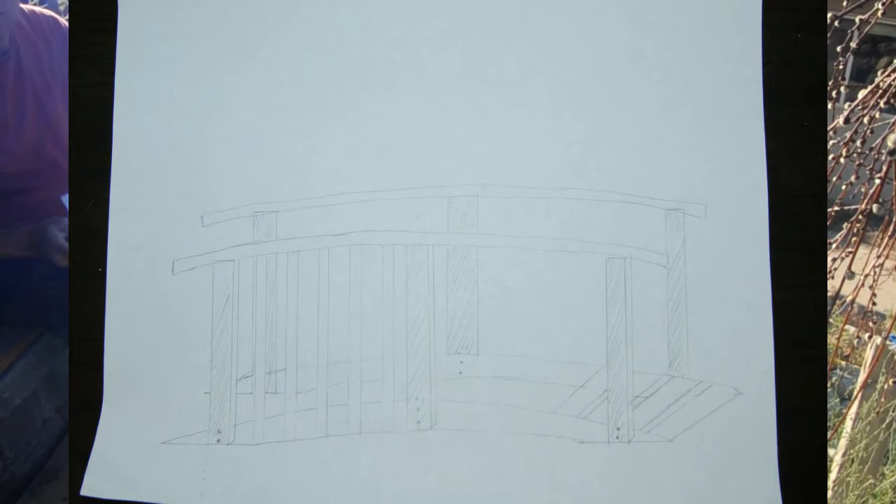Hi, the project for this week is to build a bridge across this stream here. When working with this project, I thought it's best to do some type of design. So I have a design here. This is my design of the bridge.

I'm going to start with the posts, the 4 posts, which I have here. This is redwood or common wood. I want to measure it up, so I estimated about 110 centimeters high. That's how high I want these posts and the railing. I also want to make sure it's wide enough so I can get a wheelbarrow through here. That was my goal, so if I need to carry stuff around the back, I can do that.

Just use a spade to dig a hole here. So I've dug my hole approximately the height I want. We'll just put it in and measure it. It's about 110 centimeters, about the height I want.

I'm going to leave that for now, not fill it in, and do the other 2 poles. Okay, so I've dug my 4 holes and put my posts in there. I haven't filled it in yet, so I just wanted to get a rough idea of where they should go.

This side here is going to be a little tricky for me because the path goes to the left rather than straight. But all I'll do is start with this one here. I'll get this one square and just right, then base this one from that one, and I'll probably start with that one, and this one here I'll just move it. So I'm going to fill this one in.

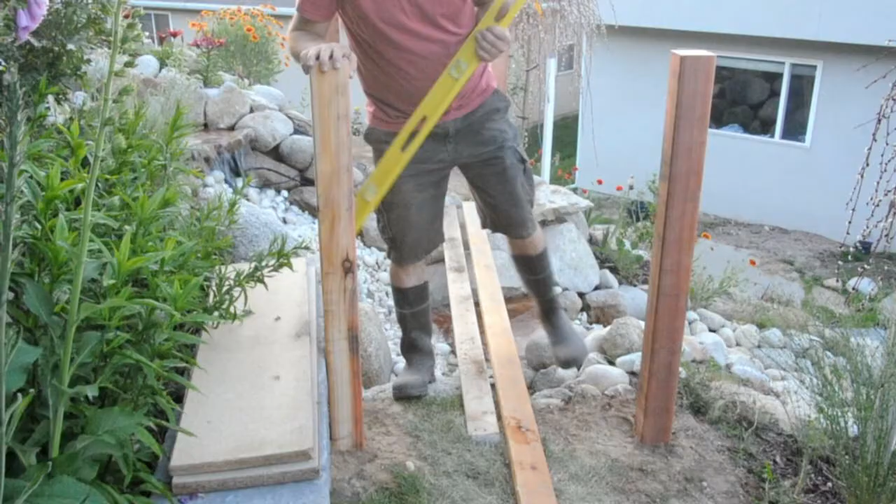The next part is to get this part level, hole here level. So, okay, here we have it, I've done all 4 poles now. Make sure that they're both level this way, and this way, on all 4 of them.

I also measured the distance between here and here to make sure they're right, and make sure they match both this side and that side, and this side and this side, so they all match exactly. That's what you want to do.

Make sure they're really nice and stable. If you can line them up this way so they both match. The board will go on this side and this side, so make sure they line up this way as well. Okay, that's the hardest part done, I think.

So now that I have these poles in, the next part is to get the baseboards in on either side here. And what I want to do is, because I'm going to put an arc in the bottom baseboard, we don't want it to end here. We want it to end a bit further off, probably about 1 foot off the post here, so we have enough area for the bolts to go into the wood here.

So I'm going to measure from this side to this side and add 1 foot on each side before I cut my wood.

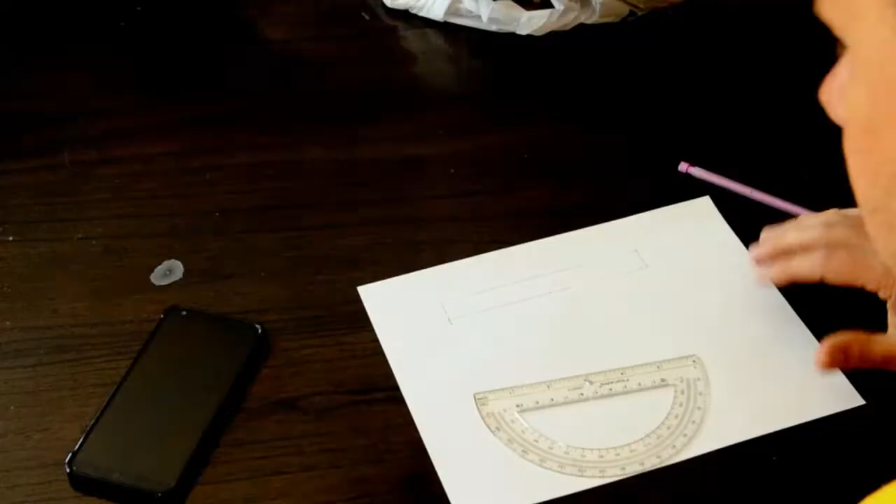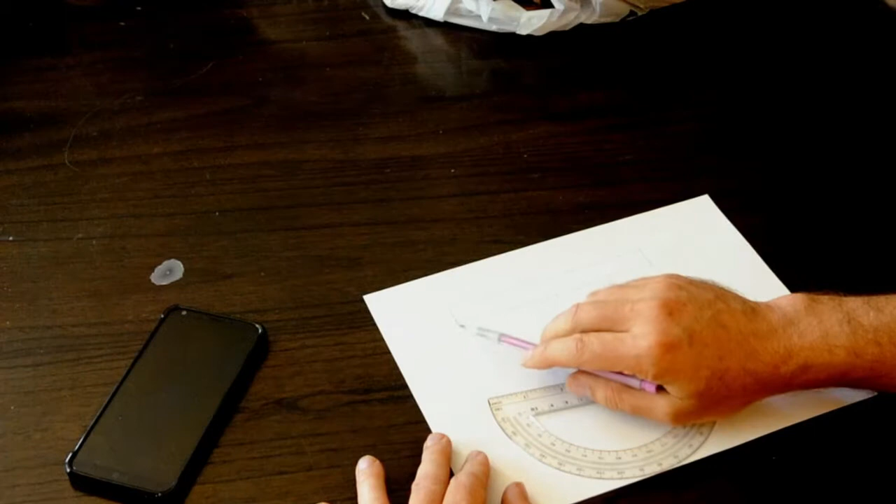Okay, now it's time to do some calculations. I've bought a 10 foot by 12 inch redwood board. That's what I'm going to use for my bottom baseboard with the arc. So the idea is I'll try to draw this as best as I can. It's the halfway point.

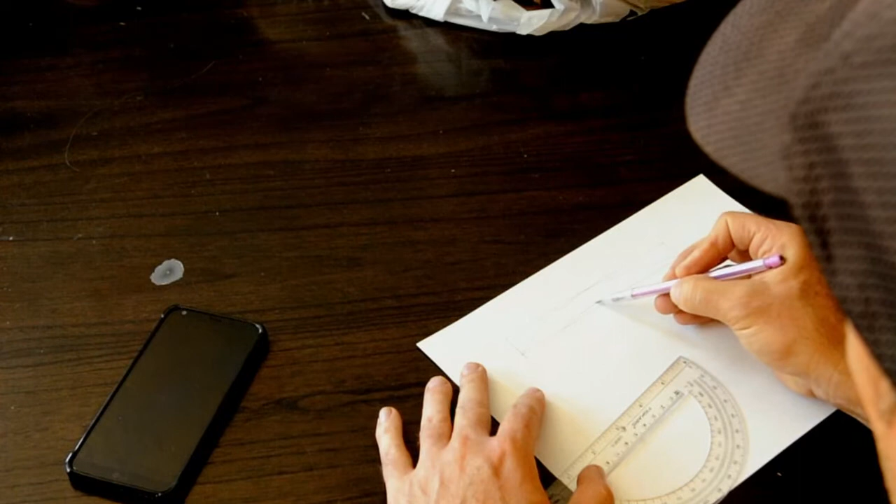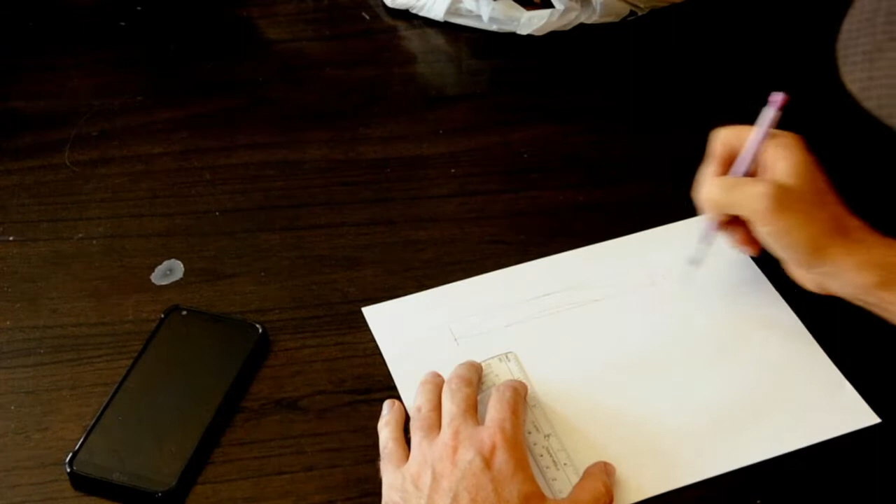An arc that goes like this. It's not such a good arc, but then the bottom part there as well. So the tricky part is to get this perfectly rounded, and to do that we're going to have to do some calculations to get the right arc. The idea I have here is I'm going to just draw a line down there.

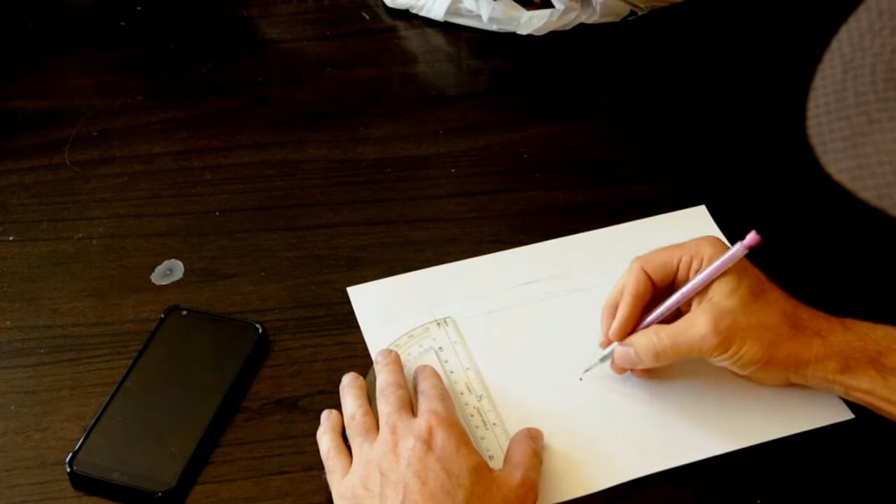This will be a circle, so from here to here there's a point there. I'm going to put a string, and at the end I'm going to have a pencil, and from that point I'm going to draw my line of the arc. We need to figure out what length from here to here I need to put my pin so I can do this arc. Now from that point to that point we know is R.

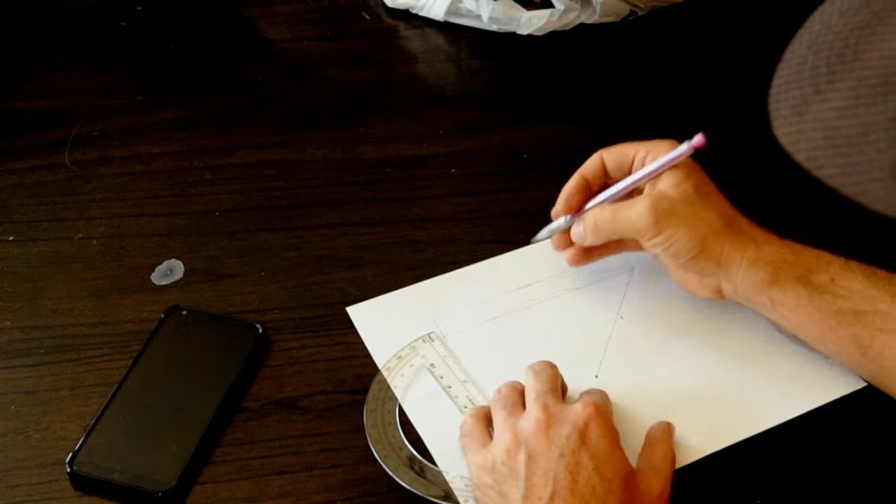That here to here is 12 inches. So we have a right angle here, and we know that this length here from here to here is R minus 12 inches, because that's 12 inches and that's the radius. So using Pythagoras' theorem...

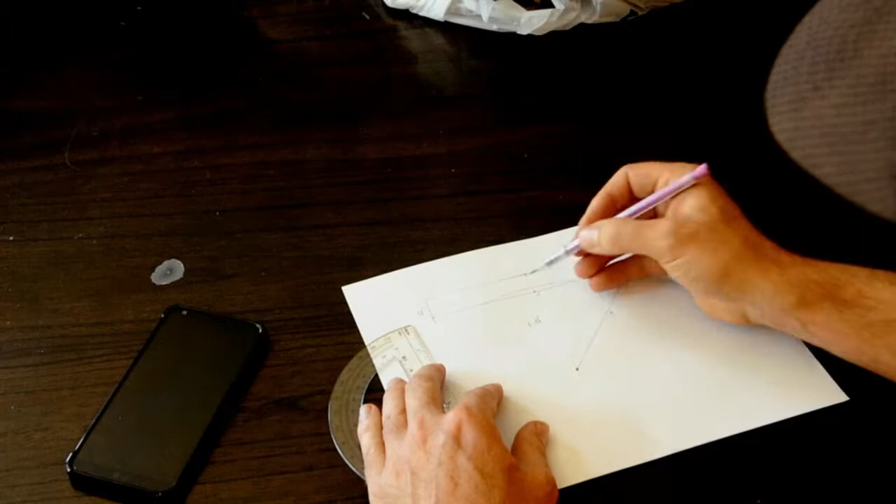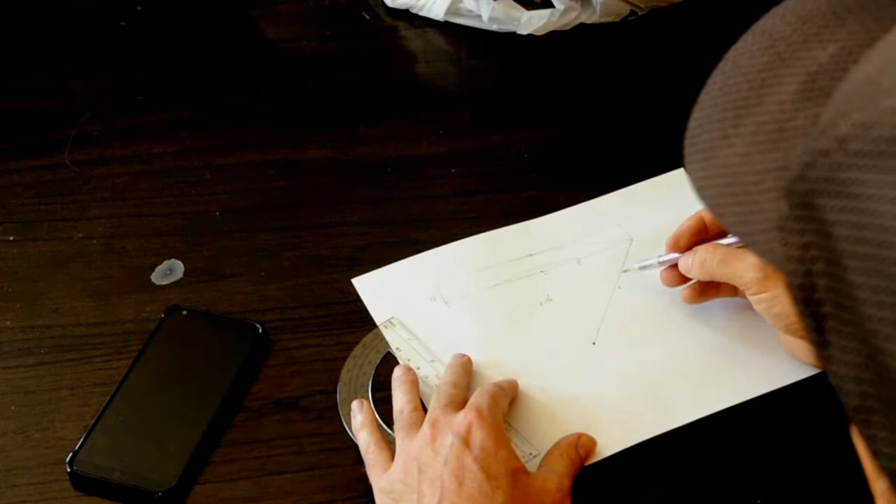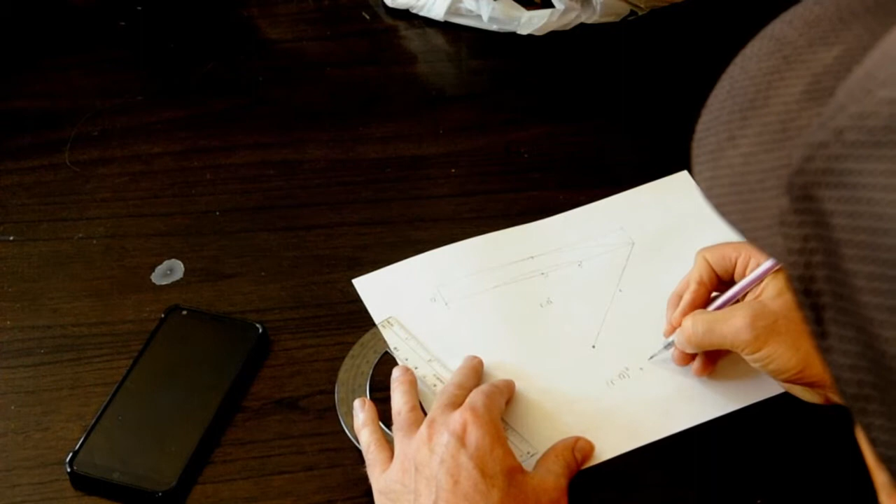So we know what this length is here, Because I said this is 10 foot, so that's 5 foot here, from there to there. So then we know that in Pythagoras, that squared plus that squared equals that squared. So R minus 12 squared plus 5 foot squared equals R squared. So you want to convert this to inches, so what's that, 60 inches.

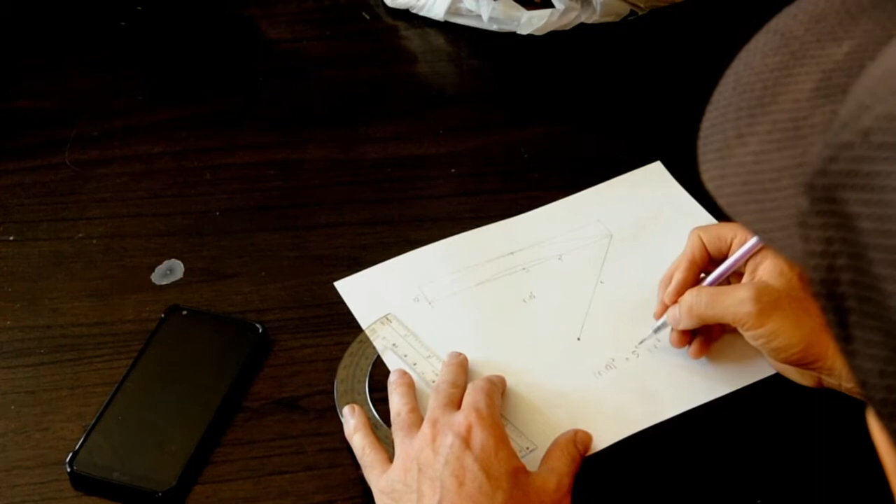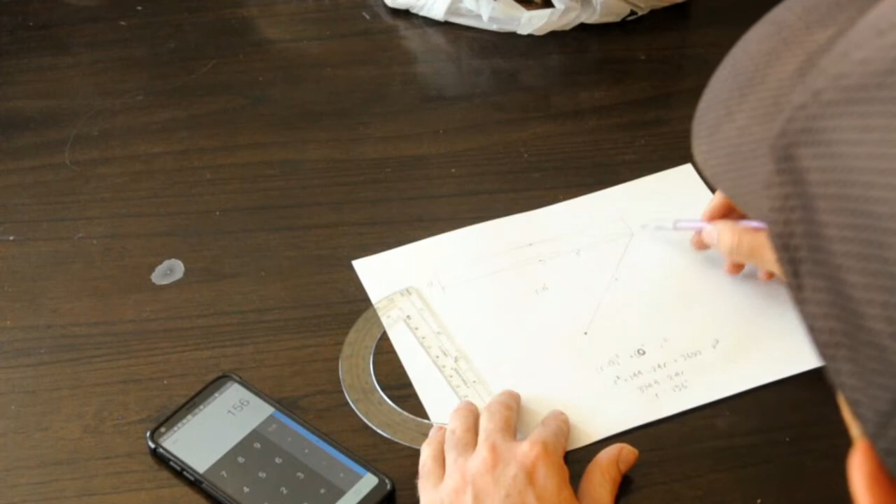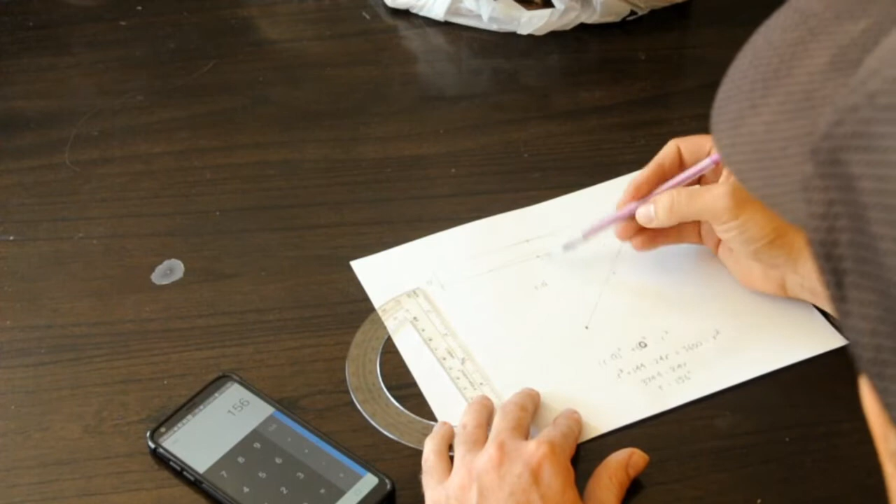So we know this here is 156 inches. So with that, now I can figure out where I need to put my pin so I can do my arc, which is this point here is 156 from the top here to here, 156 inches. I'll put a pin and draw my line.

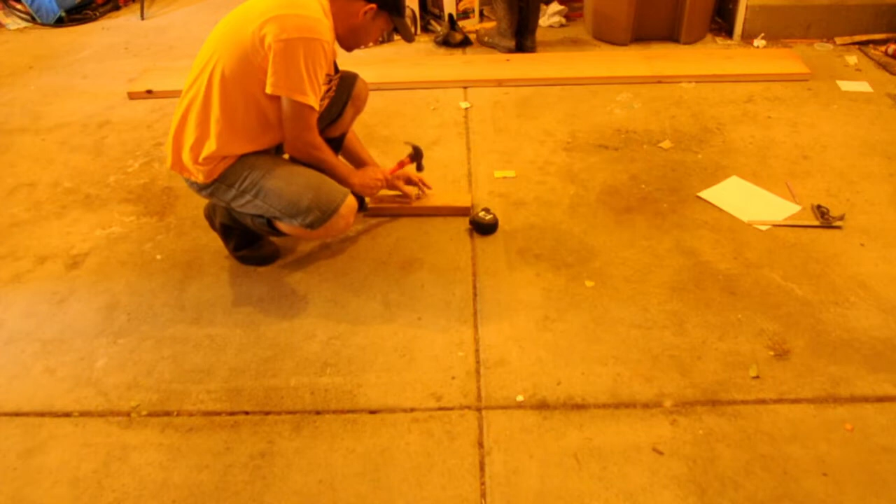First thing I'm going to do is just mark my halfway point. I'm just going to put a nail in a piece of wood here, and that could be where I tie the string around. So the radius is from the top of the board to what you measured. My example was 156 inches, I think.

Now, on this end, I just want to put some weight on the board so my pin doesn't move. I've got my daughter helping me out with this part. If you could hold the pencil in that line up there, fairly tight. Just put it over the edge. Is that on the edge now?

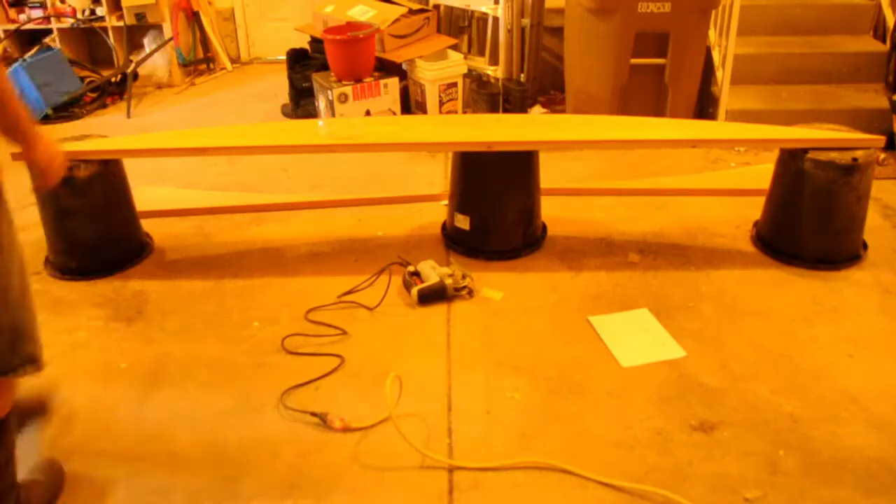Okay, I've cut my first piece. Now what I'll do is I'll grab a second piece, put this on top and mark it, and cut the second one.

I got to measure the bottom arc and cut that. So I'm going to do that now, and I thought the easiest way is I'm going to use a square and do about how much I want the arc to be in the middle section, which isn't very much. And here's the bottom arc, so I'll do exactly the same for the other.

Okay, you can see I've placed the boards here. I just need a little bit of work with getting them level. This one's a lot higher than this side, but also here. So I need to level both sides, and also this grass here, this will be covered.

I'm putting planks across here from here to here. I'll need to get rid of all this grass at the front here. So this part is about leveling this side and the other side so they're both level here.

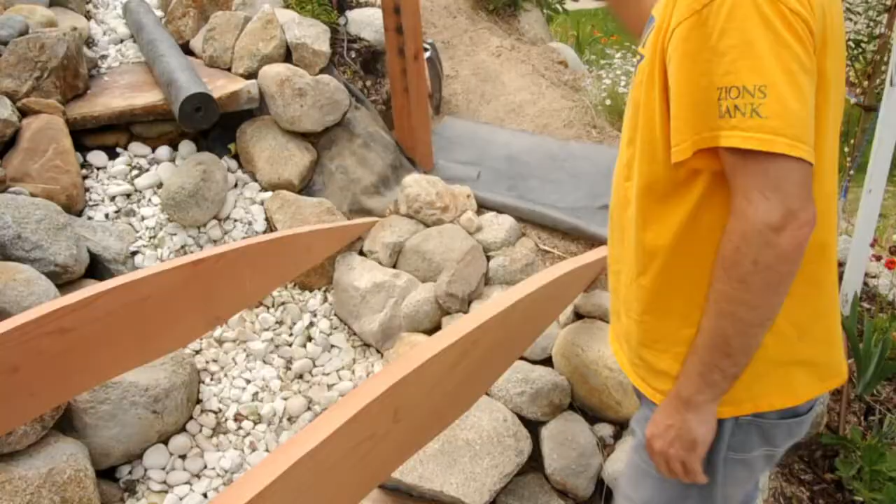So now I've done the weed mat on both sides, so I'm ready to put the baseboards on top and drill them in.

I'm going to choose to go this way and not that way so it doesn't stick out. This will be nice and flush against there, and this will be underneath the bridge.

Now we're going to do these center posts. The idea is to get them centered here. I've already cut them to the right length. I measured the height from here on that side to be the same on this side. So I'm going to bolt them in here after I get this all leveled up and straight.

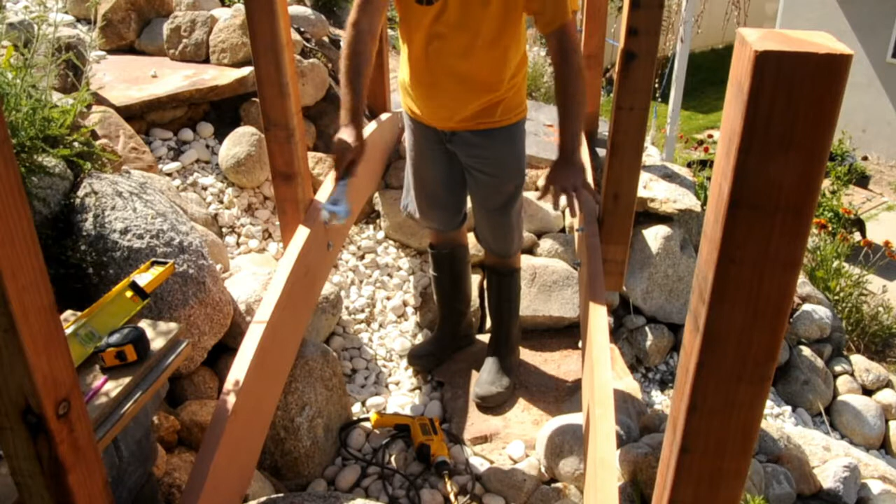Okay, now I've got my posts in. I'm just going to tighten up all the ends, and then I'll be ready for the next part, which is putting on these boards across this way.

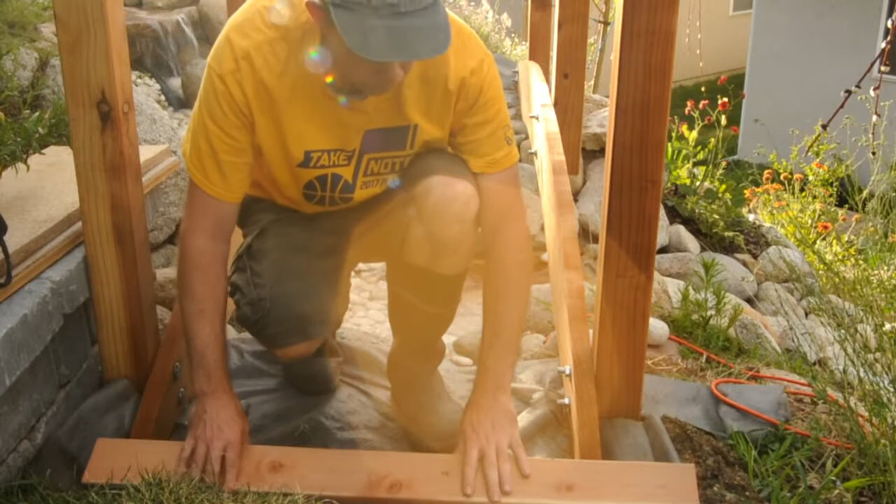The next step that I want to do is one of these floor beams at the very end of both this side and that side, and I'll secure them to the side beams here, and that'll be my start.

The next thing I want to do is just line up these floorboards all the way across. The best way to measure the distance for each of these is, I'll put the measuring tape from the outside of this board to the inside of the one I did over there, so to the inside of this board.

Then what I'll need to do is count the number of boards excluding the last one. So I have 30 boards all up, take away that one there, so that measurement I did divided by 29, and that's the spacing I'll use to do each of these.

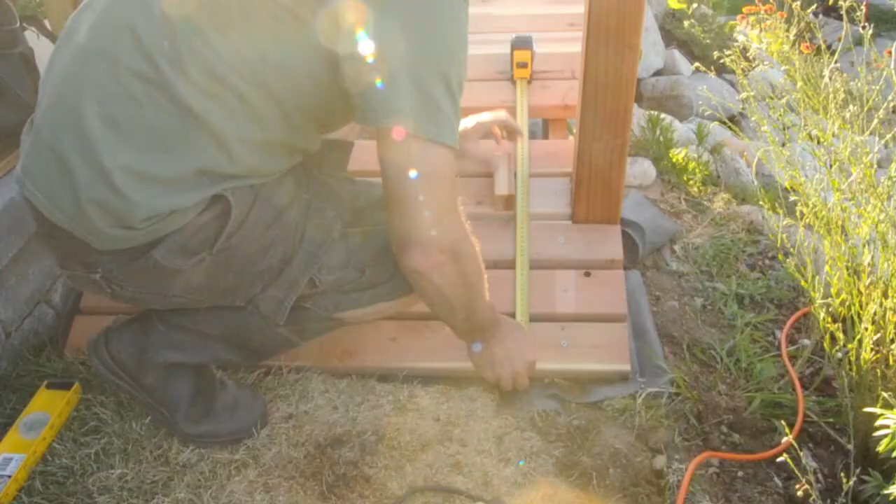Now I'm up to about here. One thing I've noticed is these two posts are tending to go out, so I'm going to put a railing on. I want to make sure that they don't go out too far. So I'm going to put a bit of rope from one side to the other at the same distance as this, so when I put these boards in, it won't bow out. It will try to match up with these ones.

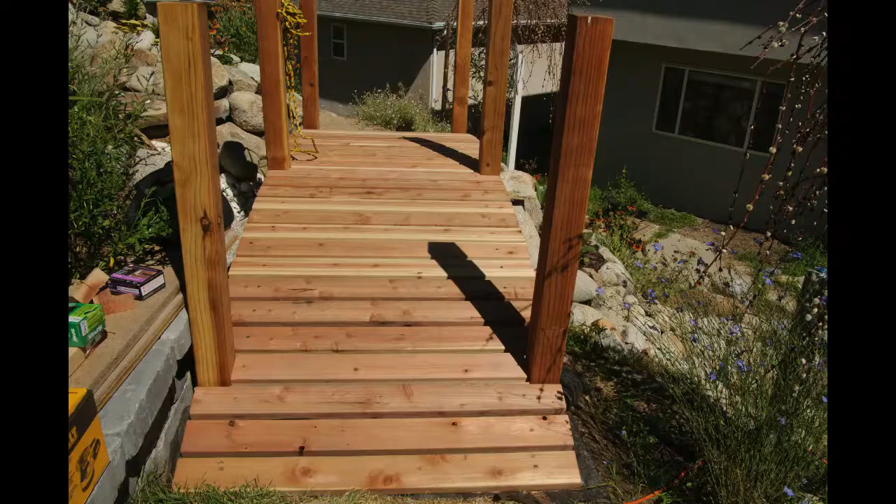Okay, now that I've wiped it all down with just a wet rag to get rid of all the dust, I'm ready to oil. Just using clear oil, I'll do one coat and see how it looks.

So here I've finished oiling all the boards. So the next part I want to do is the hand railing. Now, it was difficult for me to find wood that would curve and be flexible enough for the railing.

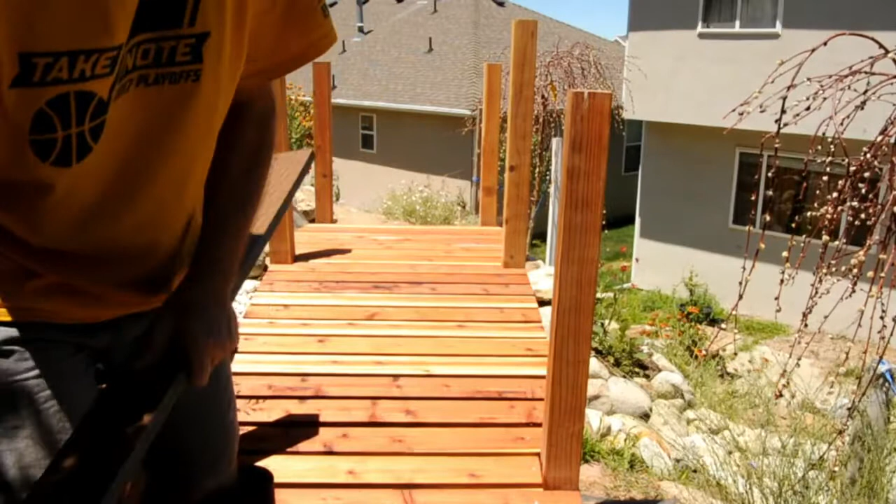So what I did instead is I got this, I think it's called Trex board. It's like a plastic and that'll bend quite easily. It was 8 inches wide and I got them just to cut it down the center in half.

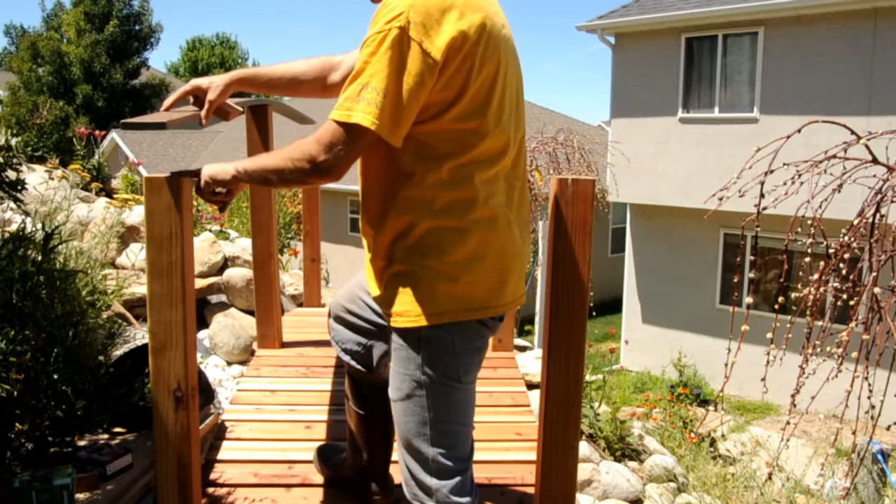Okay, I've cut these hand railings to the length that I want. The other thing I did is, I'm not sure if you can see it here, but there'll be a gap. So I've just cut this straight here, and of course this is an angle, so there'll be a bit of a gap on one side.

And just to make it look a little better and probably help it go in a bit more secure, I've cut these wedges in here just so it has the same angle and shape as the railing here.

Okay, so what I'll probably have to do here is loosen both these bolts. Because of the angle, I'll probably get just a piece of wood or wedge or something and put it in the bottom here so I can get the angle up.

Put the horizontal beams across there on the outside. The next part is to put these vertical beams.